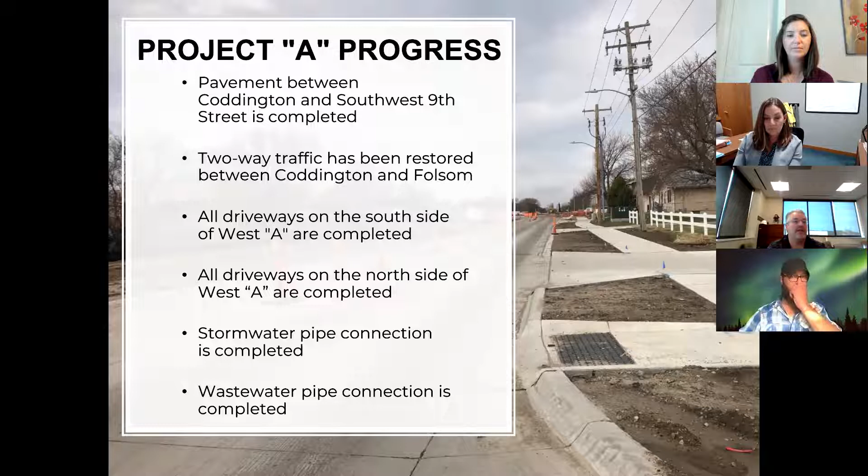So Project A, what have we gotten done? Well, we've gotten some pavement done between Coddington and Southwest 9th. We have two-way traffic restored on that, and that also means we have the driveways on both the north and south sides of West A all completed. Stormwater connections have been completed in that stretch and through most of the project, and our wastewater improvements and upgrades have been completed. Like I said, most of the storm is done, about 95% of it - there's just a little bit more to do. All of the private utilities have been relocated, and we think they're about clear of us.

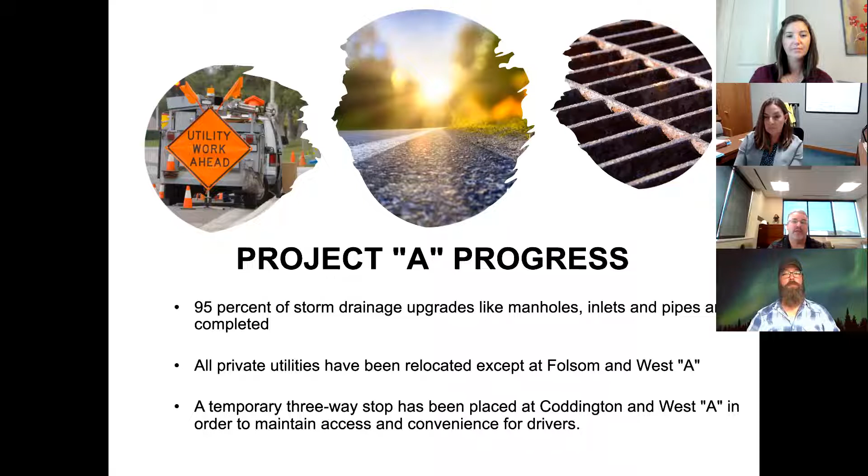I want to talk about that - a three-way stop at Coddington and West A has been put in, and that's to maintain the safety and convenience for the people out there.

So what are some of the next steps you're going to see? Well, next week - this is very timely, we're having our meeting today so we can share with you - next week a second three-way stop is going to be added north of the existing one at West A and Coddington. As you go further north on Coddington and onto Rosa Parks Way, we're going to need to put a second one in there as we shift traffic around. This is to maintain safety and help all legs of the intersection function properly.

We're also in the middle of testing the water main, so that's nearly complete when we get to testing - we hope all goes well there. You're going to see some sidewalk installation starting to fill out. And at the moment, the roundabout at Folsom is on hold until Windstream gets their work 100% finished. We think they're about finished, but I'm not quite sure about that, so I want to ensure that before I say so. That's on hold at the moment, but hopefully they can get finished up and we can start putting together a plan on how to get that addressed.

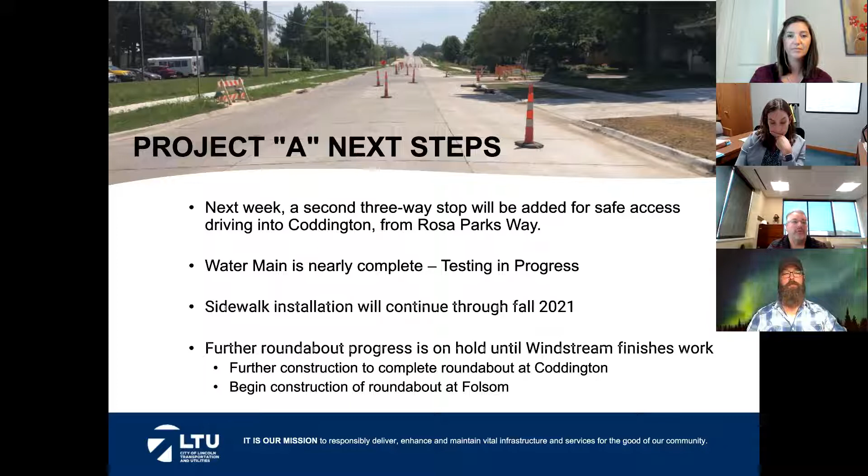We're going to continue that roundabout construction you're seeing at Coddington. I was just out there yesterday - there's paving going down, some more paving going down, and talking with the contractor, once that water main's up, we'll even be able to fill some more gaps that are over top of the existing water main.

So let's talk a little bit about this timeline. The main culprit here, without a doubt, is the Windstream private utility. They had delays in obtaining material and delays in when they could cut over those connections. They wanted to keep service to the area. This is one of the main feeder routes that comes in from West Lincoln and goes all the way into town and back out, so there's a lot of customers on here. It was not an easy thing to get done, but that has pushed this project into probably the winter months, and probably pushes its final completion into summer of 2022.

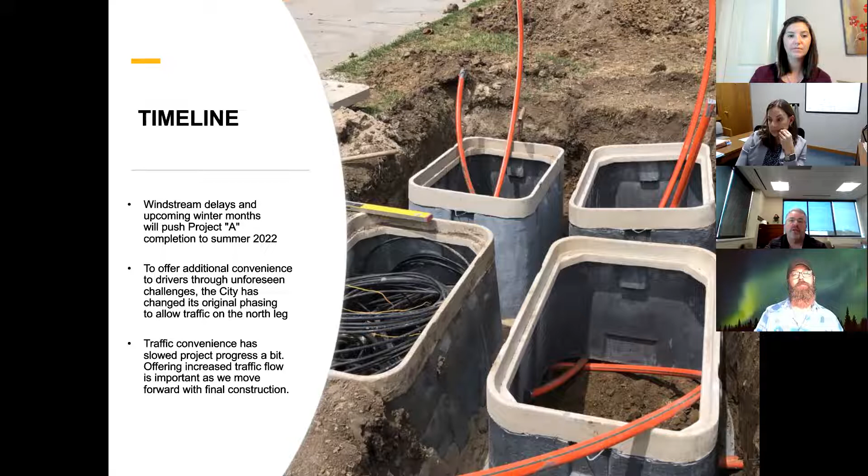Because of this unforeseen circumstance where we weren't able to get that Windstream work out of the way, we've changed some of the phasing. If you remember, we had planned to close that north leg of Coddington down and allow the contractor a larger area to work on. That was under the assumption that Folsom was done. Since Folsom isn't done, we don't think it's right to put traffic through that Folsom interchange or intersection right now, so we're going to leave that north leg open. But there's a trade-off: that also pushes things longer because we can't give a full working area to them. We've got to be more cautious around the moving traffic, and that's going to slow this project as we try to maintain that convenience for folks in the area.

I just want to mention that school's going to be starting Monday. That was one of the reasons we wanted to get two-way traffic installed, to help decrease the traffic using Coddington and West South Street. With that, we'll also be doing our traffic flow monitoring in that area and watching how things are going. Traffic engineering has been out and placed some additional stop lines in there, and they're studying the area.

This is going to be one of the future school zone improvements that's getting planned. You may have seen some of the information on what we did this year, and in future years we'll be doing others around other schools. This is one of them that they're planning for and studying right now.

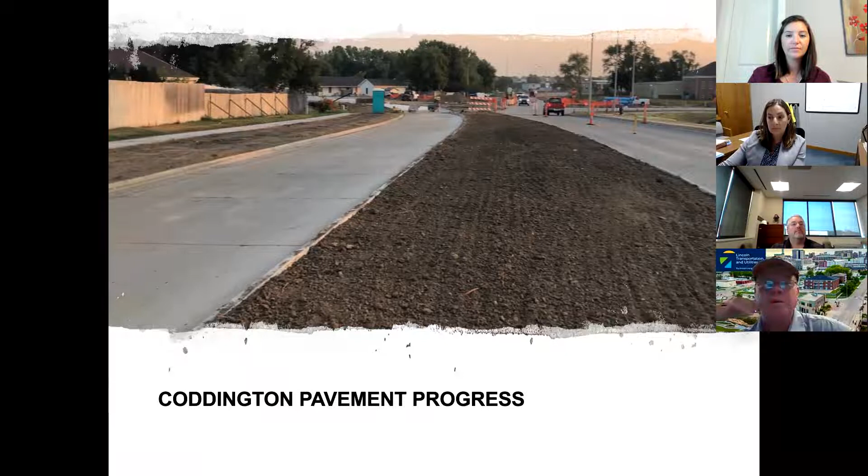And I've got country bandwidth out here, so I get a slow transition. Pavement progress on Coddington and West A: we've got two-way traffic going on A, which was a nice thing to have. And we're starting to implement driveways and things like that throughout the area to get the roundabout at Coddington built.

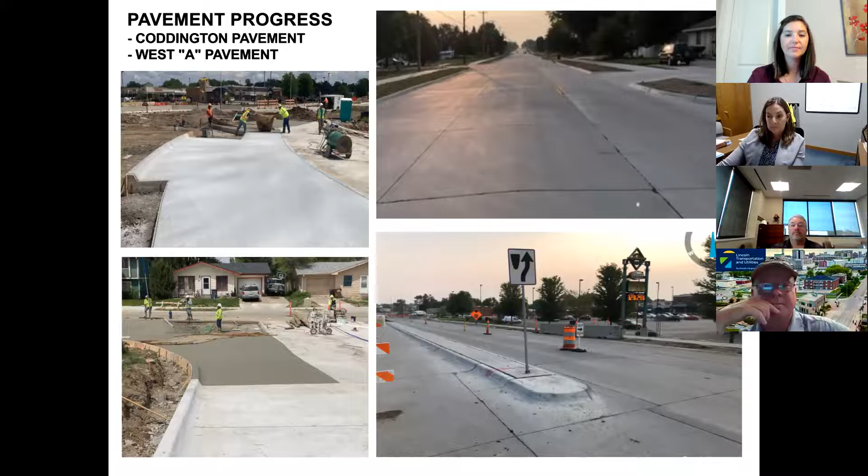So we're maintaining street safety for our travelers. This is looking southbound on Coddington with Russ's Market on the left. I know some of the traffic changes have been challenging for people to pay attention to. This particular intersection is a bit of a challenge to get through, so we appreciate everybody's patience going through that.

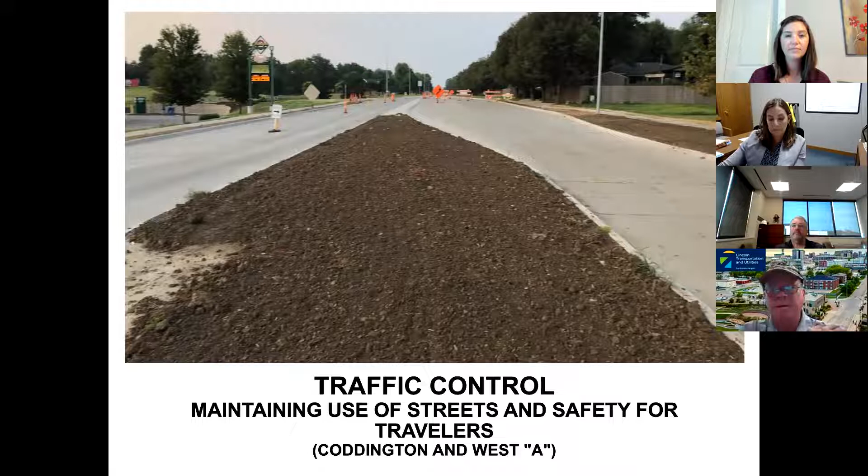So our water main is 95% complete—pick your number, 95 or 100, whichever way you want to go. It's not completely done; we need to pressure test and do some things there to get it finished. That should be finished shortly.

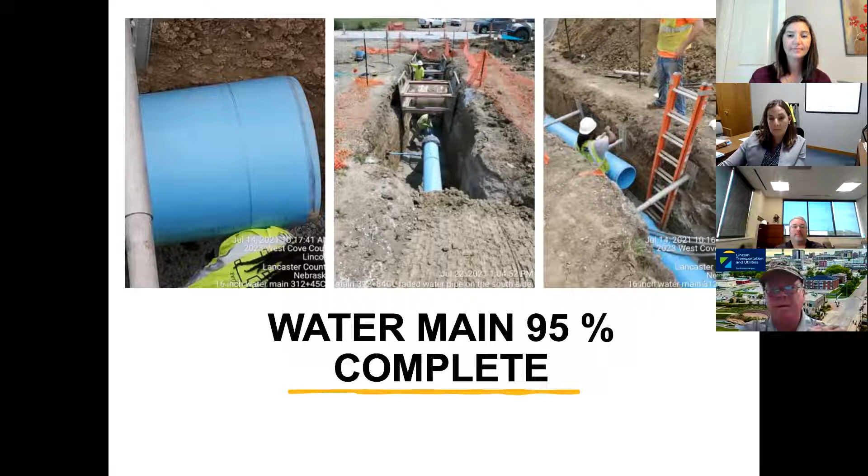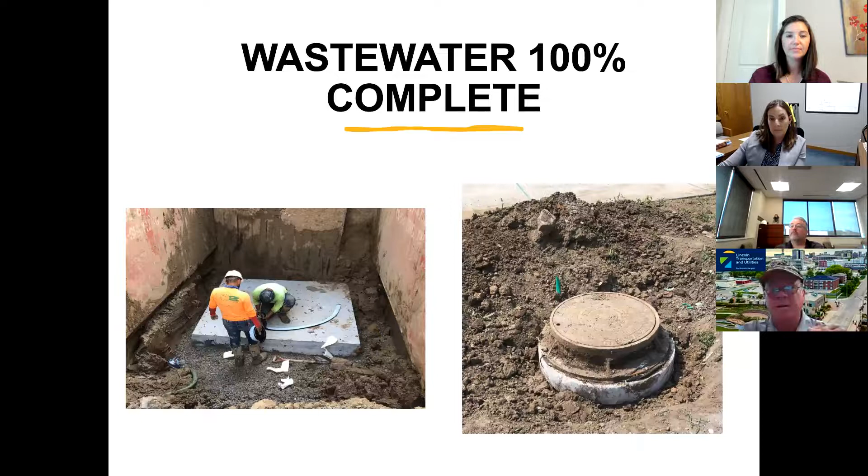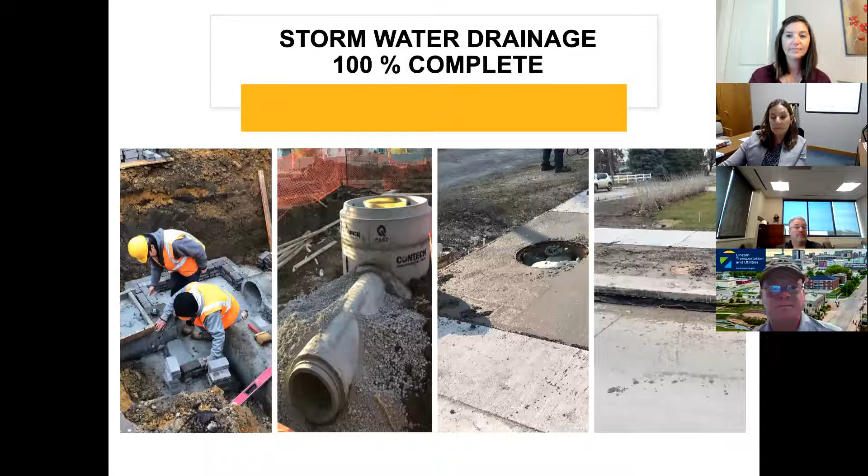One of the features we really like is improving access so that the Americans with Disabilities Act is followed, so that folks who can't get around as easily walking or biking can get in and out of the project site. This is an example of some of the features built there. The truncated domes, the black domes, help blind and visually disabled people navigate those areas.

Next up, seeding and grading. We like to see this because it means we're almost done. So we'll start seeing quite a bit of that get done east of Coddington now.

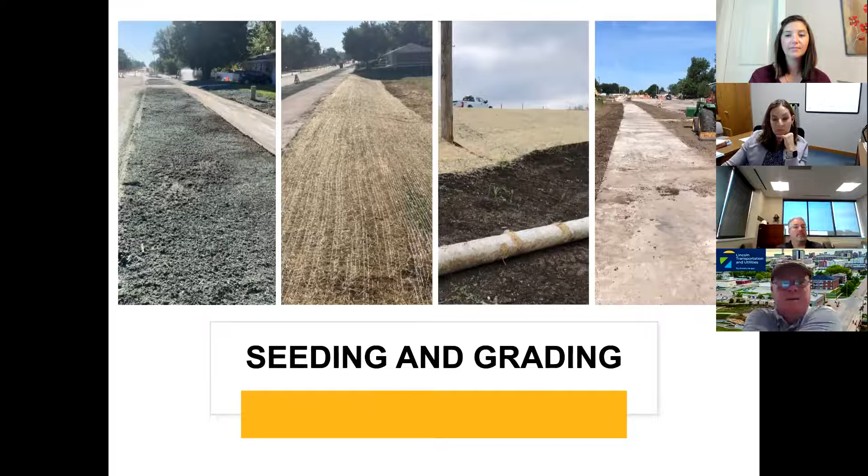Hi, I'm Danielle Vaukel, as Mark said, and I've been the design engineer on this project since the beginning. A lot of you probably recognize me from all the other public meetings we've had, but for the rest of you who might be new to the neighborhood, or maybe this is your first public meeting, I've been working with the city for almost 5 years, and on this project since it started. So it's kind of fun to see it from the beginning all the way through construction.

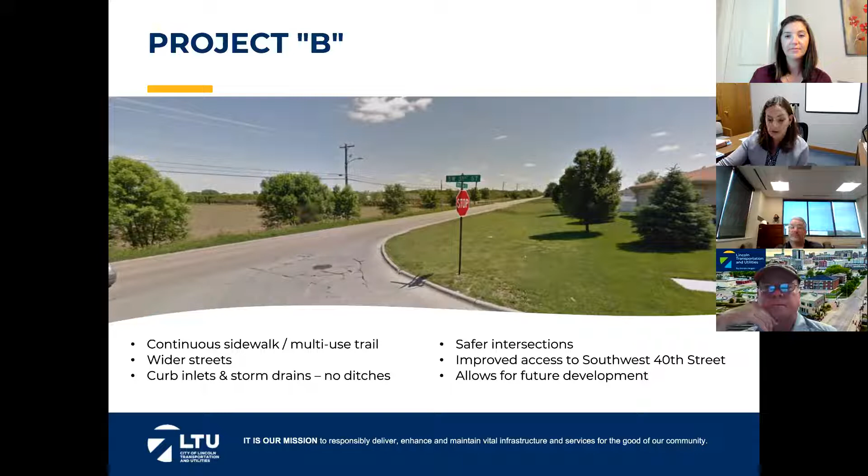We will improve the routes to get to Southwest 40th. Currently some of you might want to head west to get into Lincoln, and with the improved street improvements, that route should be a lot easier. The roundabouts and other elements we're constructing will also allow for future development on the north side of West A over the next few years.

I know this is difficult to read depending on the size of your screen, but this is an aerial map of the entire project. It's available for you to view on the city's website - just go to the city's website, type in West A, and it'll take you to the project site. Then you can interact with this map, zoom in, and look at your properties and see more detail of everything we're building in this area.

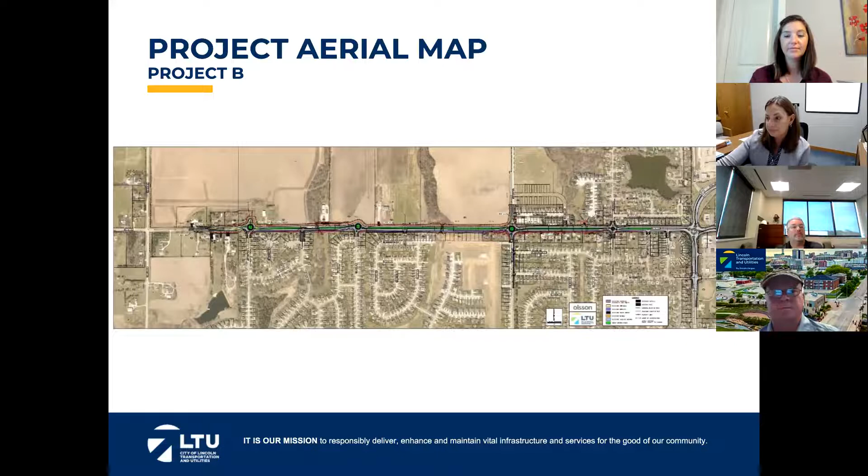So the project timeline for Project B - while we know Project A is still under construction, we need to take a really good look at the schedule to determine what we want to do for Project B. We're evaluating the construction of Project A and seeing how well we can get it done. We really want to get the intersection at Coddington complete before we close anything further west - it'll just allow better traffic for the neighborhood. The other thing we need to evaluate is the utility relocations required as part of Project B, and we really need to get those done prior to doing any of the street improvements.

The major utility we need to look at is the overhead line of LES along the north side of the street - they want to get it buried underground. But prior to them being able to start on that, we are currently working on all the right-of-way acquisitions and temporary easements that we need for construction. So we're working on the easements along the north side for sure, so LES can get started, but we're also going on all the other right-of-way properties throughout the project.

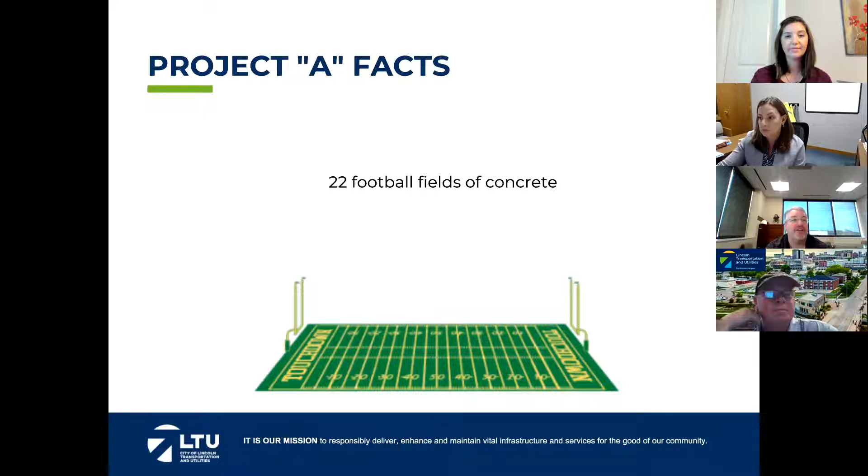Thank you very much, Mark and Danielle. So we provided some great information about Projects A and B. We want to remind you of a few things: 22 football fields of concrete out there, and the next one has six and a half football fields of concrete.

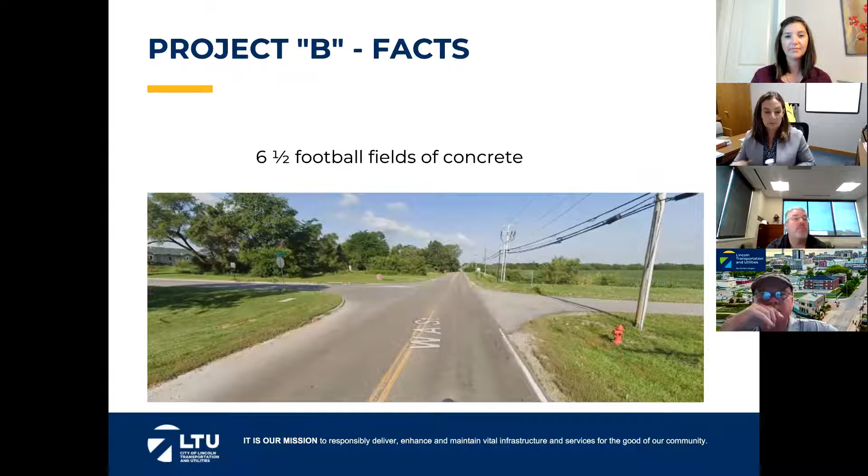We're hoping to meet with you again in March of '22 and give you an update on where we're at. We're going to keep trying to communicate through our social media updates, and you're always welcome to go to lincoln.ne.gov, search West A, and you should be able to find information there as well.